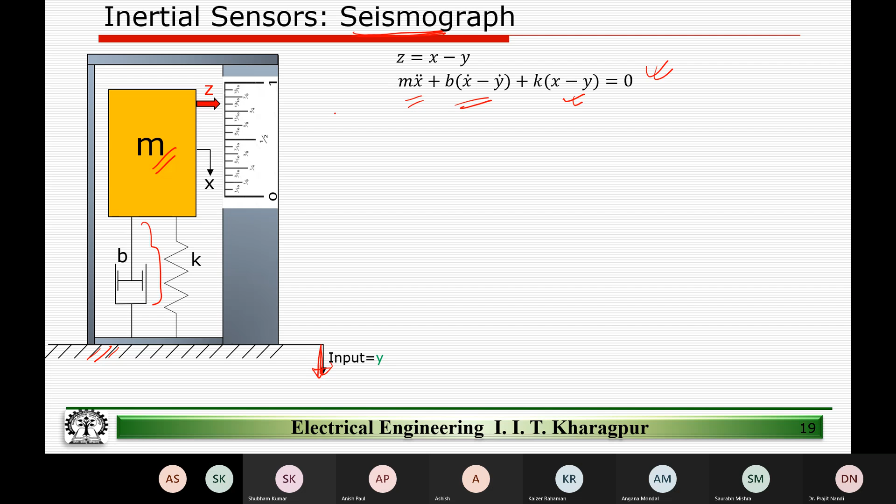the opposing force because of the damper is equivalent to b times, this is the damper constant, multiplied by the effective displacement seen by the damper, and similarly the force offered by the spring opposite to the force provided by the mass is k times the overall displacement or overall compression of the spring, right? And that equals 0. So this is from the basic force equation acting on this body, right? Any questions up to this? It's simple to understand, not a big deal, right?

So then if I rearrange, I replace this variable x with z plus y. Why am I rearranging in terms of z and y? Because the input is actually y, and the final measurement that I'm taking is actually z, right? X doesn't come into picture as such. I just took the help of x to form the force equation, and once I replace x, the force equation takes the form of this, right?

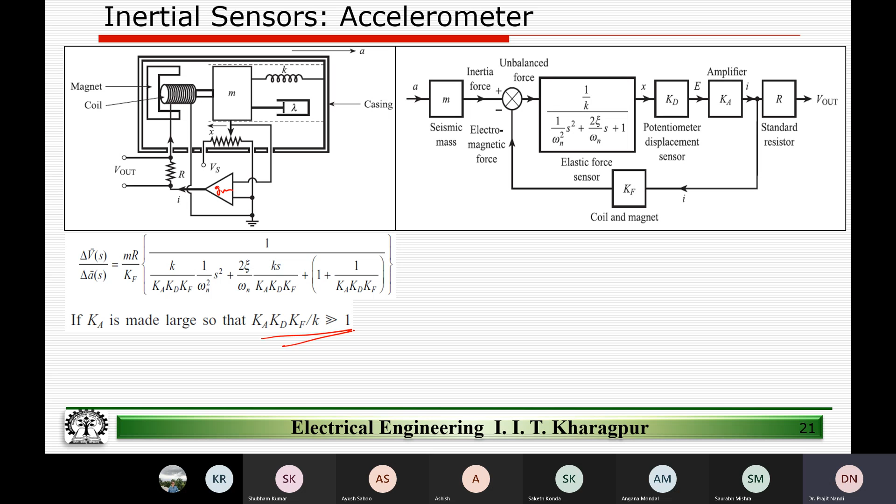So this is one. Now what we see is we have more controllable parameters here, given by Ka, Kd, Kf, right? So if we now make Ka large, Ka means this transconductance, if we make it large, so that this term becomes very large, right? What I can do is I'm just rewriting. Whether this is large or small, we'll see later.

But the fact is we can make this term very large, and then instead of omega n, I'm rewriting the expression as omega ns. I'm just rewriting this expression where this term comes. I'm just rearranging, and what do we see? We see that omega ns, the natural frequency of the feedback sensor system, is now omega n multiplied by a factor here.

So omega n is the same omega n that we saw in the seismograph system, assuming the mass and the spring constant k; in the seismograph we had denoted the damper coefficient as b, here it is lambda, but that's fine. The thing to take away is, because of this feedback mechanism, the natural frequency of the feedback system is now omega n multiplied by this factor, and of course the eta also. So this is modified in the new feedback system.

The damping coefficient is also now modified. And one thing you can see is the damping coefficient is much smaller now, right? And you can see, in a way, what is the disadvantage that you see in this equation? Do you see the problem as such?

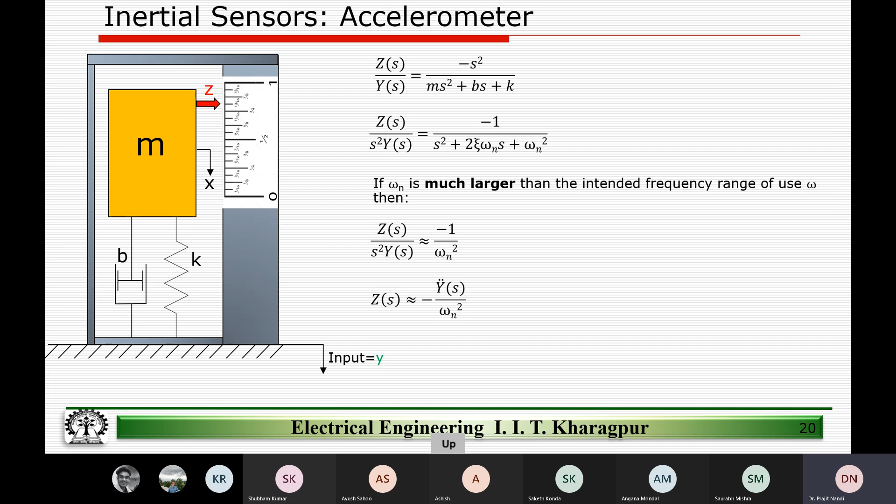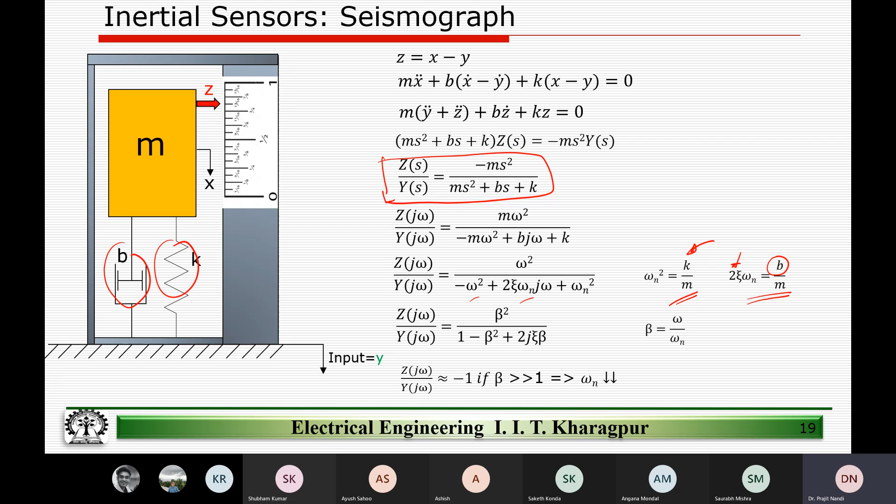So if you look at the seismograph equation we had, what did we see? We had omega n and eta. So this was omega n square and this is eta, right? The only variable that I have in my control is k for omega n square, and once k is fixed, the other variable that I have is b, with which I can control eta, and both of these are mechanical constraints. That is fine because there is no electronics here, right?

But in this, I have already incorporated electronics, right? And in spite of that, I have not been able to decouple the damping coefficient and the natural frequency any more than what it was already. Is that a fair statement to make? Because if I increase this, eta is reducing, which is fine. But then I do not have completely separate controls, right?

I still have to rely on the choice of the damping coefficient lambda and the mass m, which are physical parameters. I do not have any electronic control with which I can decouple omega n and eta s, right? Any comments? Is it understandable what I'm trying to say?

And see guys, this is what you should expect from me when I set questions. Probably I will give a twist somewhere and then expect you to identify the advantages of the proposed system over the existing system. Or maybe I will ask whether we can do a simple modification to the system wherein I can get separate controls for eta and omega n, right?

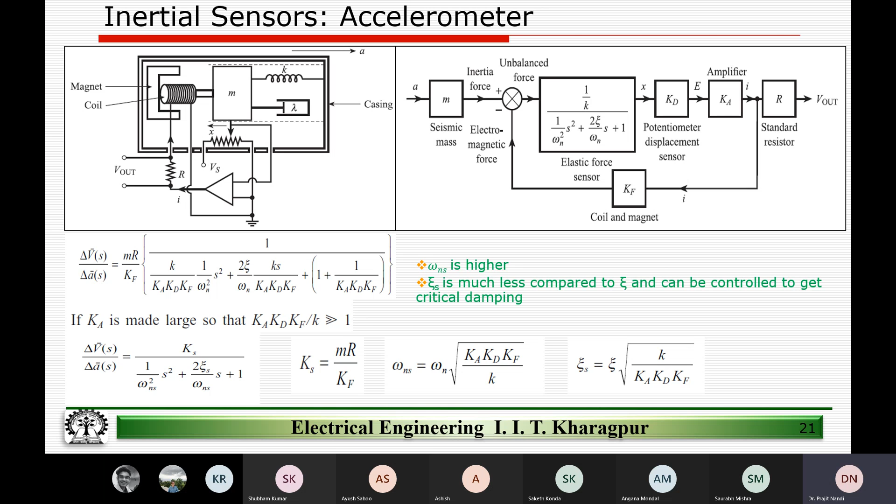Okay, so now we are going to look at a little bit more. What we are discussing is the concept of feedback and its application on real systems, right? First, in the very first class on this topic after the mid-semester, we looked at how feedback helped in a simple electronic system, and the system was completely electronic. Second, we looked at inertial sensors.

And now we are going to look at pneumatic systems and see how the concept of feedback can be applied to our advantage, right? And what do we mean by pneumatic systems? These are used in industrial applications, and typically these systems are made of either air or oil. And why do we call it pneumatic? A simple Google will tell you pneumatic has got something to do with pressure, right?

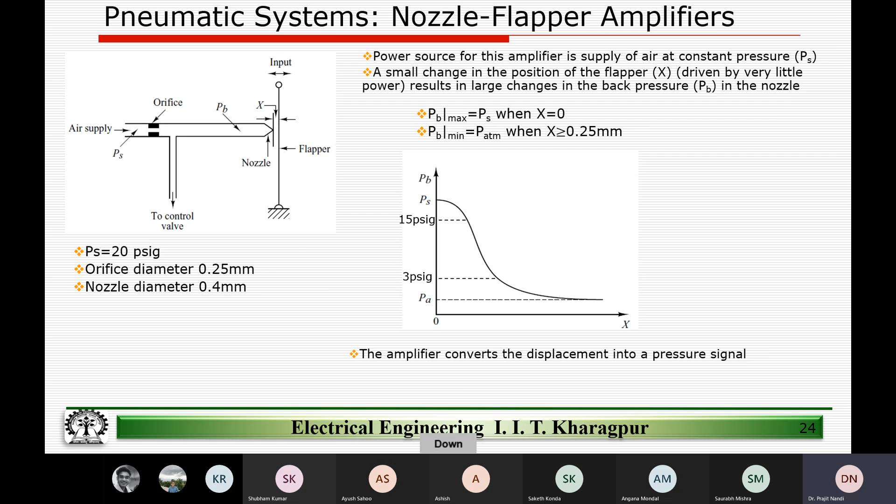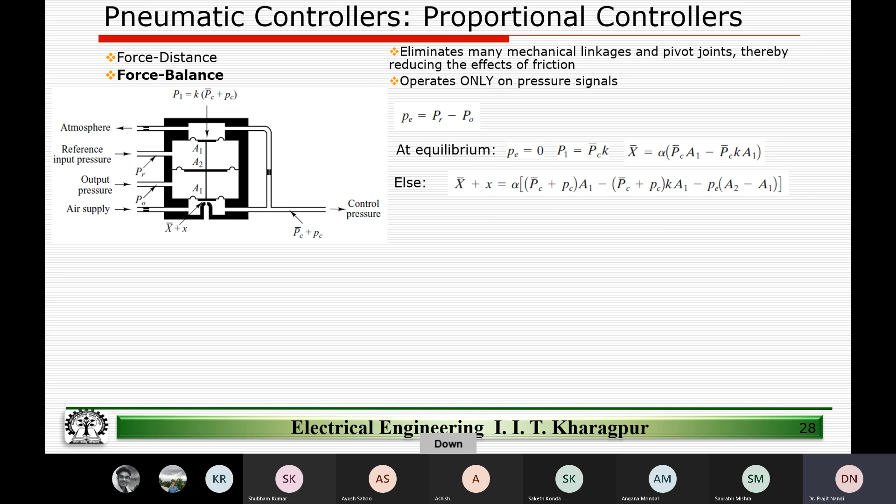And these pneumatic systems we will actually use to measure, so we'll see what we'll use them for. But for now, let us just look at the difference between a pneumatic and a hydraulic system. One second, I'm just trying to see whether we are going to discuss the hydraulic part or not. I think we will be discussing hydraulic systems towards the end.

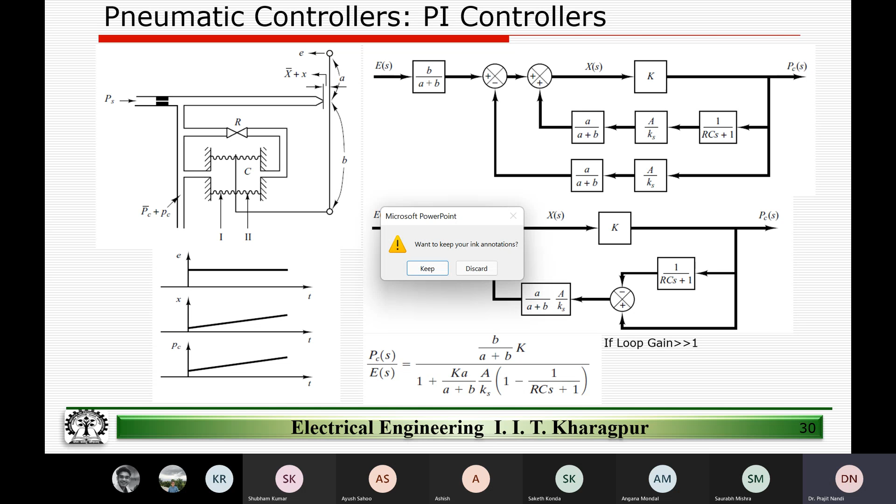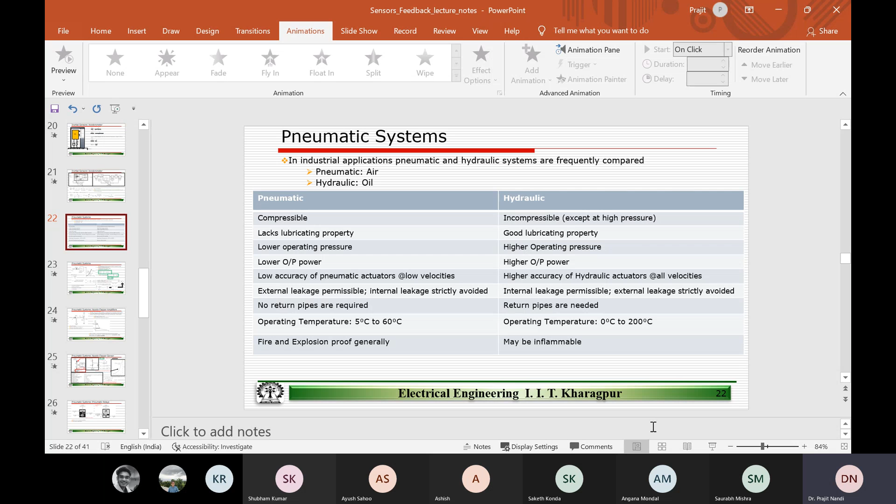So anyway, one second, I'll just go back to the... so we'll discuss both the pneumatic system as well as the hydraulic system. So what are the disadvantages? Let's do a quick comparison of both these systems, and of course we'll look at feedback.

So the pneumatic system is compressible. Hydraulic is not compressible, and that is understandable. Pneumatic systems are made of air; we take help of gases, which are easy to compress, right? But a hydraulic system will be made of fluids or oil, and it is relatively difficult to compress unless we apply a very high pressure.

Pneumatic lacks lubricating property, and this is also understandable because air will not work as a lubricant, right? So all the moving parts of the sensors will undergo a little bit more wear and tear. However, for hydraulic systems, because the fundamental mechanism involves a liquid, we can use the same liquid as lubrication of the overall system. So the hydraulic system will probably be a little bit more robust.

Lower operating pressure, and this is higher operating pressure. This is again understandable because the fundamental element that we are using is gas. So we probably cannot apply too much pressure, but because this is operating with oil, we can operate it at significantly higher pressure.

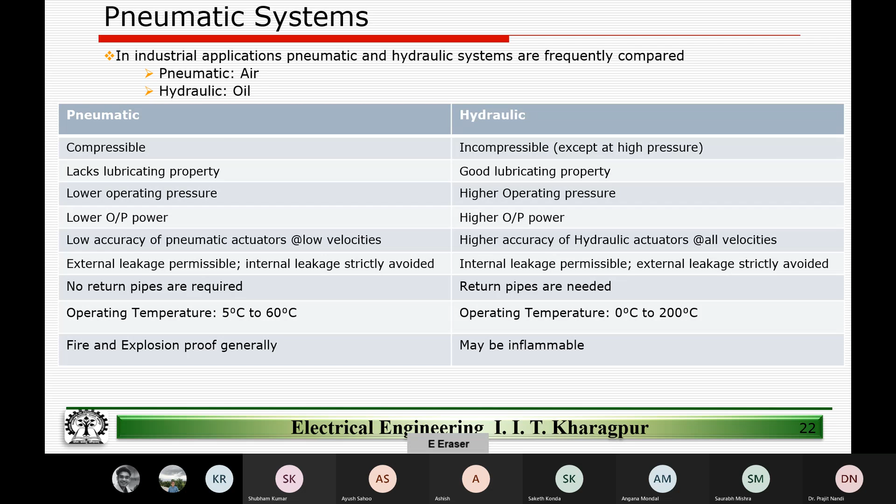So let's discuss the first pneumatic system. And here, what you see here is we have a pipe, right? So by now we should be well comfortable with the concept of operating point, right? Both electronically, and you can think of the operating point in similar terms in the mechanical domain, right?

So we have the operating fluid or the operating air around this has a pressure P, and there is an incremental, small pressure change that will happen in the environment, which let's say we need to measure, right? And here we have a nozzle kind of a thing, which in electrical terms is equivalent to a resistance, because you are trying to, let's say, pump in the gas, but because of the nozzle, because of the dimensional difference, this is going to resist that change, right?

If this diameter of this nozzle is larger, what will be the value of the resistance? Just think simplistically, right? No equations, nothing. What will be the value of the resistance R if I make the diameter of the nozzle larger? Less. So it will be lower. Exactly, it will be less, right? So we do understand now.

One second, let me have some water, please.

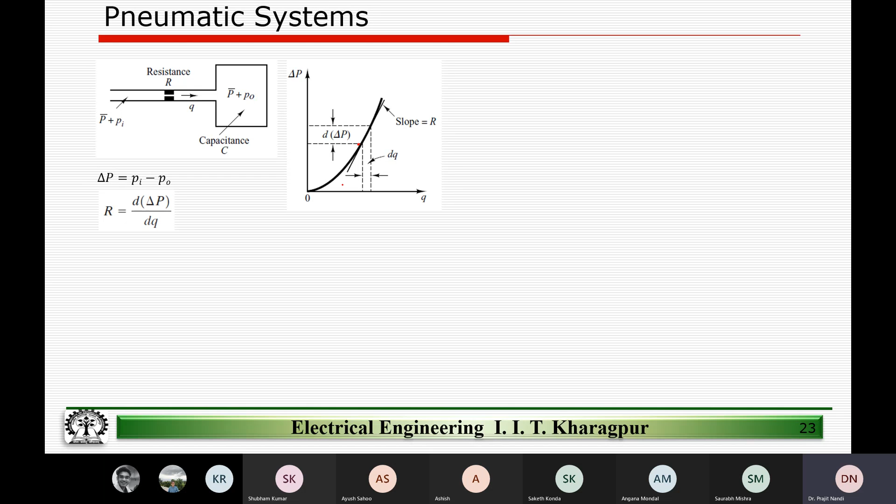And what is C? So we are saying this is a capacitor, and this also is kind of understandable, right? If you think of the air as current, the gas is actually being stored in a container, which is equivalent to the charge getting stored in a capacitor, right? So if we think of this container as a capacitor, we can define the capacitance C as change in the gas stored divided by change in the gas pressure, right?

So what is change in the gas stored? This is delta Q in electrical terms, and change in gas pressure you can think of as delta V, the voltage. So the change in the voltage across a capacitor is going to result in the change in the charge in the capacitor. Synonymously, the change in the gas pressure is going to result in the change in the amount of gas stored, right? And so this relation gives us the equivalent capacitance of the system.

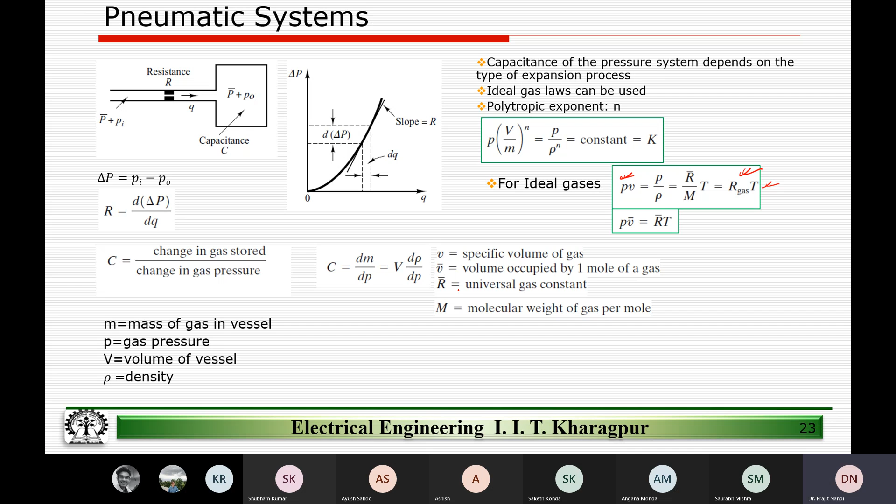So for ideal gases, we can write PV is equal to P divided by rho. V we know, right? P we know. So one second. So if you see here, let's focus on this PV equal to RT. Pressure, volume, the R gas, and T is the temperature, right? So V is the specific volume of the gas, and this V bar is nothing but volume occupied by 1 mole of a gas. This is a gas constant, and M is the molecular weight of the gas per mole, right?

So these gas equations you would have dealt with. I'm just revisiting those. But now the point is, why are we doing all this? We have to come up with an expression for the capacitor C, right? So V we know, and del rho by del P. This is what we are interested in, the change in the density divided by the change in the pressure. So del rho by del P is given by n, an exponent, a polytropic constant, this R gas, again a constant depending on the kind of gas you have, and the temperature T, right?

So what do we see in this? The capacitance that can be thought of in this kind of a system is dependent on the volume V of the vessel, the kind of gas that you have, R gas, and the temperature, right? So capacitance is given by this. Is this understandable? And since this is this, now I can write q is equal to C dP by dt.